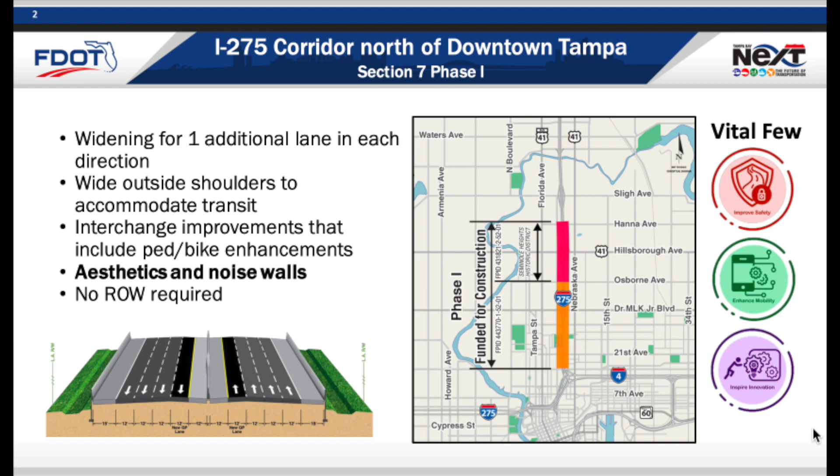Hi, this is Mauricio Rosas with an update on the construction project on I-275 from Martin Luther King to Hanna Avenue. This project was approved back in 2020, and the Department of Transportation substantially reduced the amount of widening that was initially proposed. This project is scheduled to break ground within the next couple of months and last a few years. So, at a recent Cafe con Tampa meeting, I asked District Secretary David Gwynn to explain what was happening north of Martin Luther King to Hanna Avenue.

So please, listen to what he has to say.

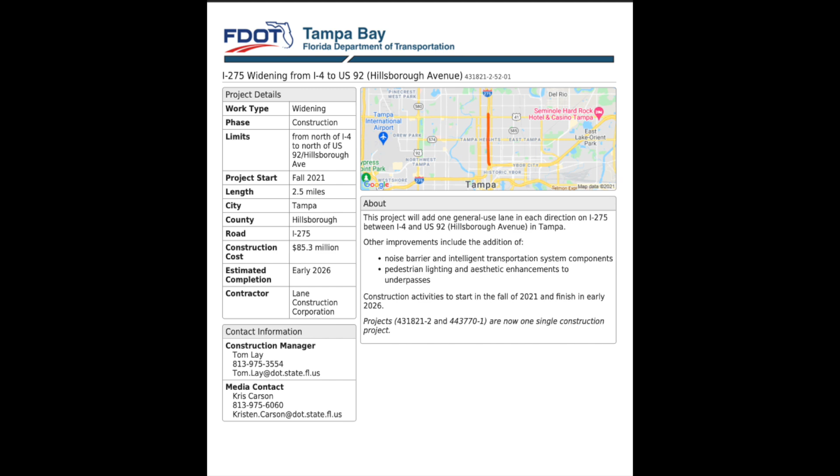David, thank you very much for what you've been doing. You've been doing this. Could you introduce yourself? Oh yes, I'm sorry, Mauricio Rosas.

Thank you, David. Mine's more of a, not so much of a question, as it is, can you explain the project that's about to break ground north of MLK? Can you explain on that, please?

Sure. So this is a project on I-275, essentially from just north of the downtown interchange to around Sligh. I have a video on our website. If you go to the Tampa Bay Next website, that shows the problem we have. But in addition to the problem of the two lanes getting onto I-4 from 275 and the two lanes coming off of I-4 to go north of 275, if you want to get in that lane for I-4 coming southbound, you've got to go past MLK before you can even get in.

And then people are backed up and you can't get over, and so that's where a lot of the problems occur. If you're going back the other way, for a few years I took every day the route from I-4 to go north on 275. As soon as you make that, and there's usually a lot of traffic out there, if you don't get out of that lane before MLK, you have to get off.

So what this project is doing, within the existing right-of-way and mostly within the existing pavement that's out there, is adding an additional lane all the way up to north of Hillsborough Avenue near Sligh. That's so people can either get in the correct lane earlier and get out of the main line, or have a longer distance to be able to merge over. So that fits in right with the downtown interchange project. So the two of them together work.

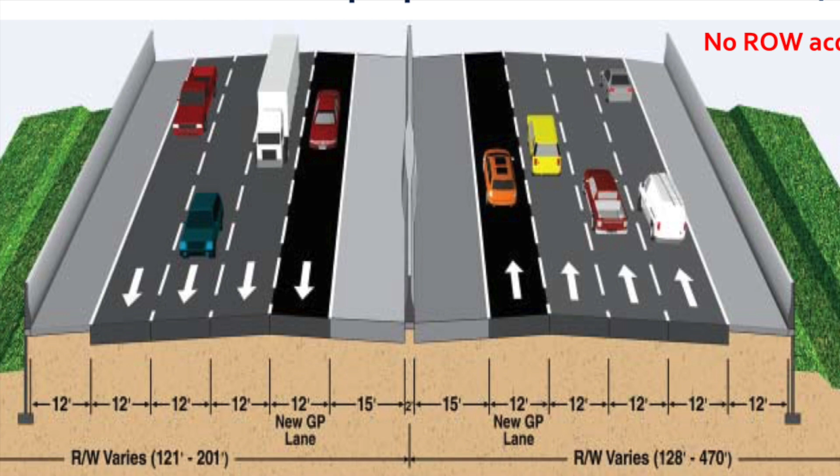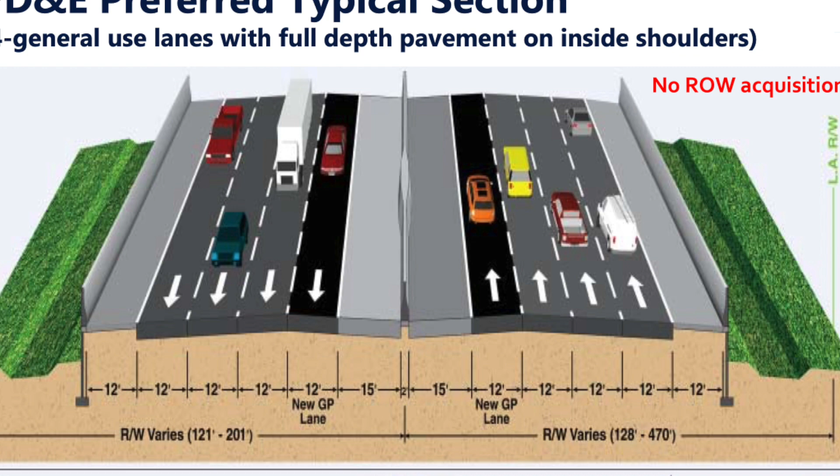As you can see from this image, there will be one lane added northbound, one lane added southbound, but this is not considered a complete rebuild, unlike the downtown interchange. There you will see significant changes to the Columbus Avenue and Martin Luther King underpass. The DTI project will begin sometime in the next several months. So we will have a lot of construction going on for the next several years.

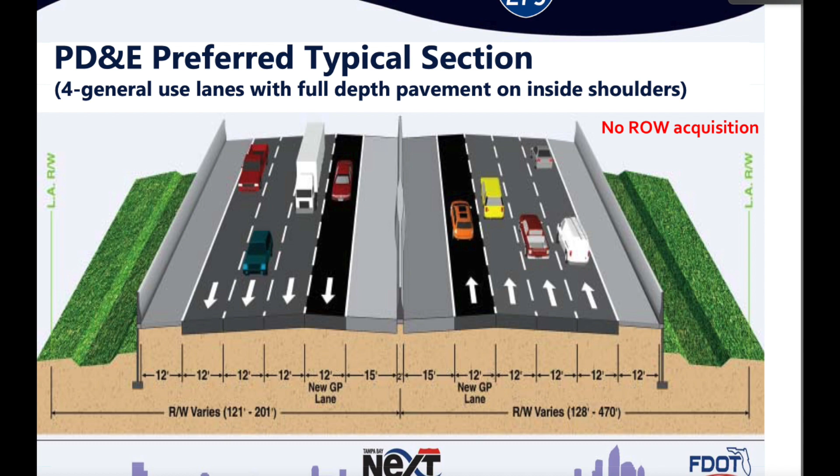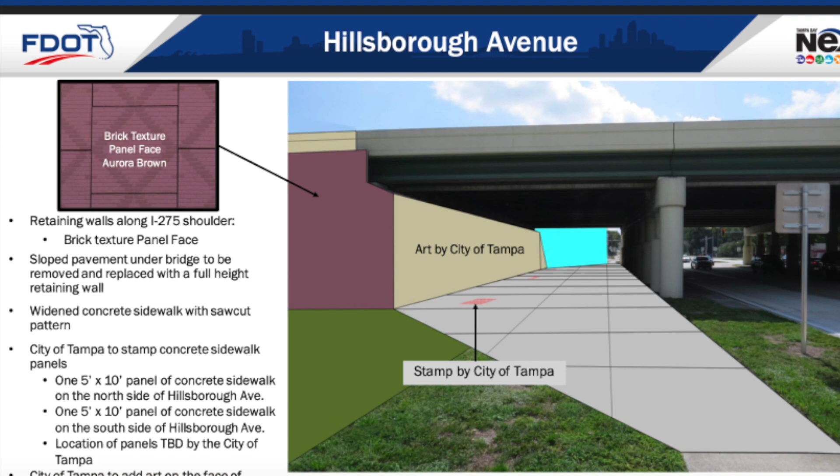Now let me expand on the slides provided by FDOT. Let's begin at the Hillsborough Avenue and I-275 intersection. That entire area is going to be rebuilt. So instead of having a slanting slope, it's going to be vertical.

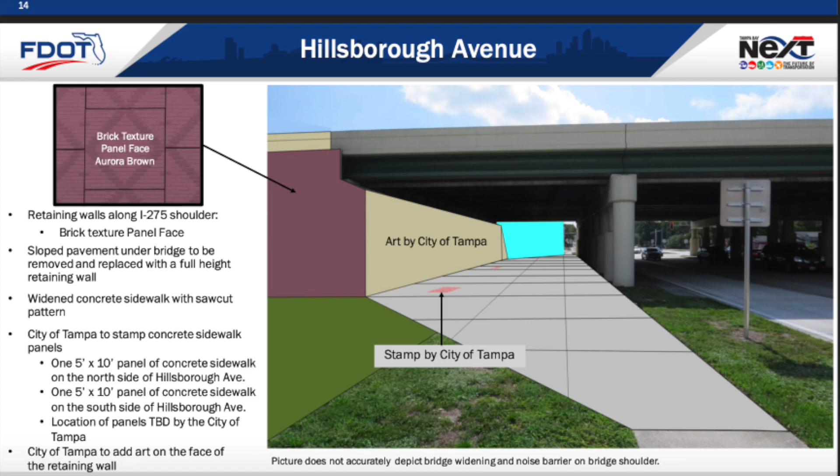We would like to see red brick fascia for the walls along that area because it lines up with the historic district. The new structure will also include public art from local artists.

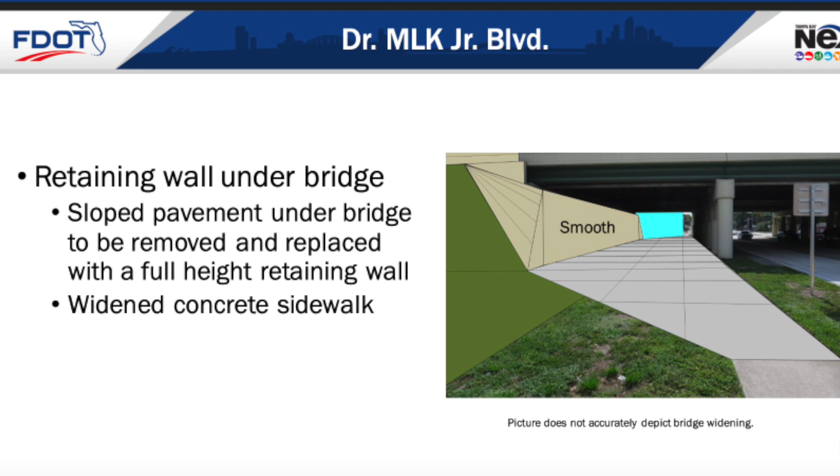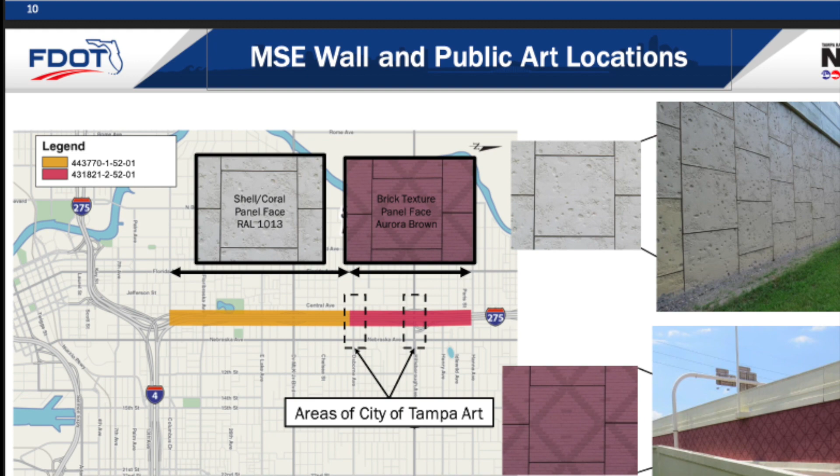Noise barrier walls will be put in on both the east and west side of I-275, from the downtown interchange all the way up to Hanna Avenue on the south side. But they will not have the same brick structure. The brick print is limited only to the historic area. It is more expensive, but we should see continuity as part of this structure.

The noise barriers along the shoulders will be 8 to 14 feet. Fencing will be removed and replaced along the frontage roads. They also plan to add fencing along the crossroads to prevent access along the right-of-way between private property and I-275.

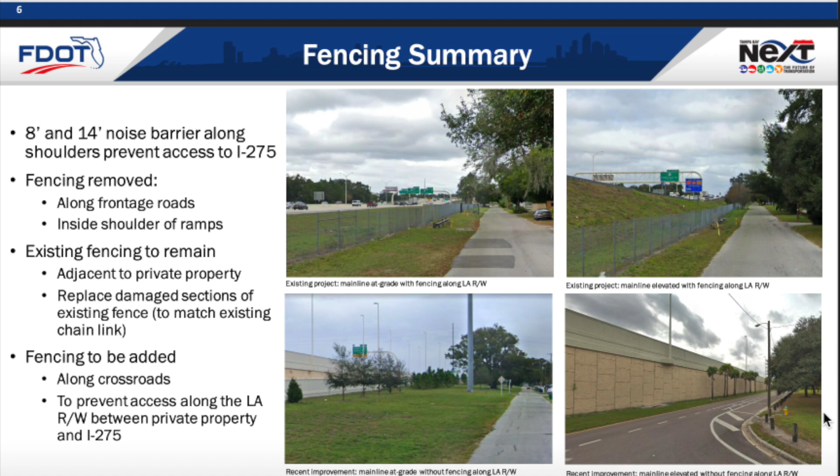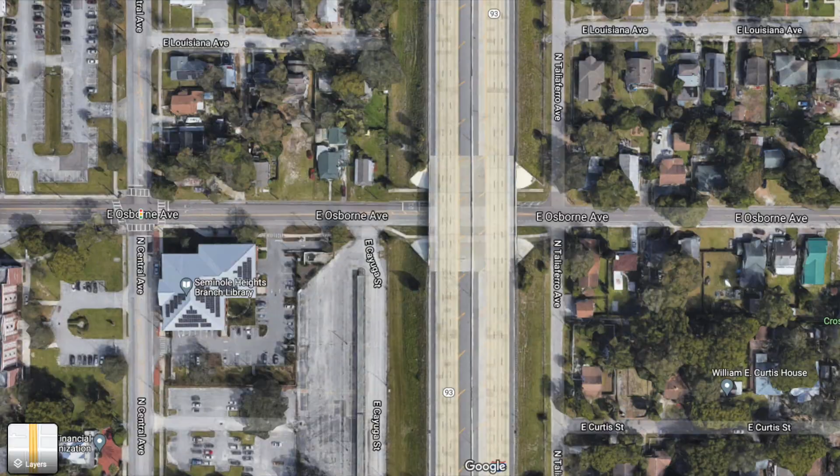The underpass at Chelsea and the underpass at Osborne will not be completely redone. Instead, they're going to add what they call gravity walls and fencing to keep homeless people from seeking shelter there. But that does not make them safer for students and pedestrians. The underpass at Osborne will have public art installations.

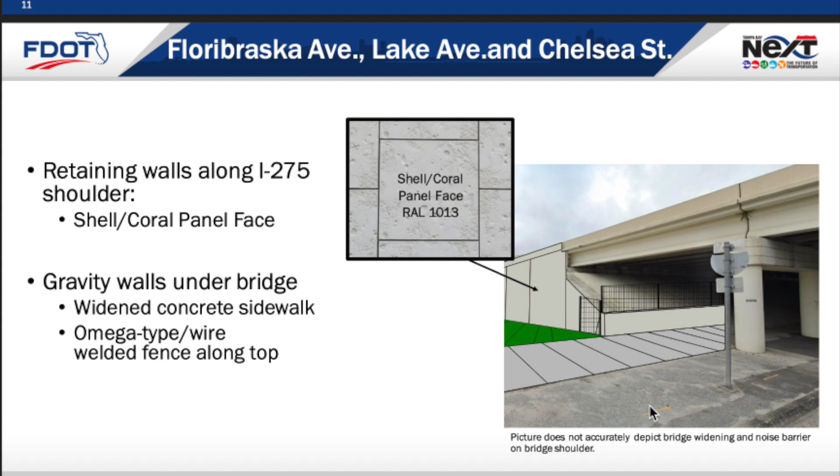And that's it. So what can we do better to engage the Department of Transportation, the city, and the county to improve Osborne and Chelsea?

Everyone's talking about public safety being number one. Well, Osborne Avenue has a high density of kids walking through it. There's Broward Elementary School, Hillsborough Middle School and High School, and the Seminole Heights Library.

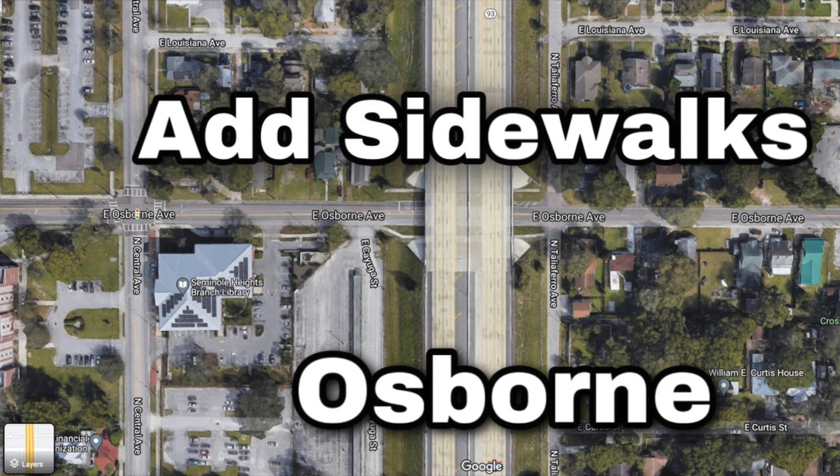I bring this up because there is a state law that says all roads within a 2-mile radius of a school must have sidewalks. What better opportunity to make this happen while there's ongoing construction on I-275? In fairness to the Department of Transportation, it is not within their scope to provide sidewalks.

But if the city and the county commissioners ask the Department of Transportation to partner with them, most likely they will. So it's our job as citizens to contact our elected officials so we can see the improvements on Osborne and Chelsea.

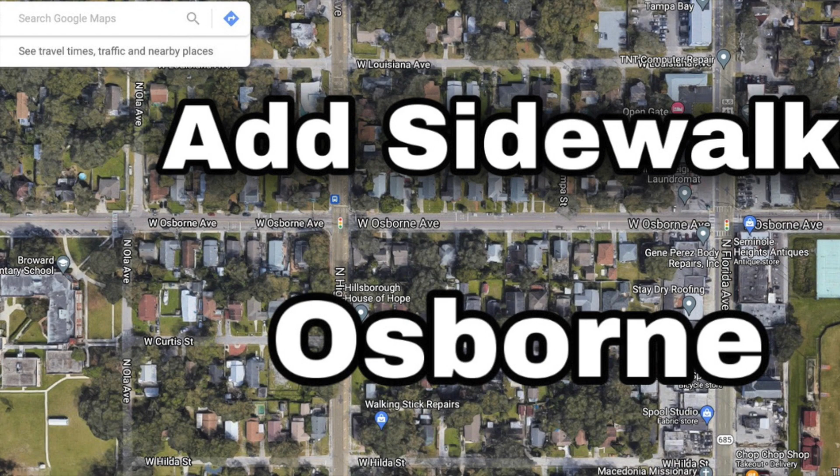There is an unanswered question about this project: what is the Department of Transportation doing to reduce the number of cars that travel along the highway and the roads adjacent to it? Within this project, there is nothing that they're doing to reduce the number of cars.

Though there is an opportunity on Taliaferro Avenue from Hillsborough Avenue all the way down to East Lake Drive, which connects to Robles Park. It would also connect to other bike trails, including the Ola Avenue Bike Boulevard. That's an exciting project scheduled to break ground within the next couple of years.

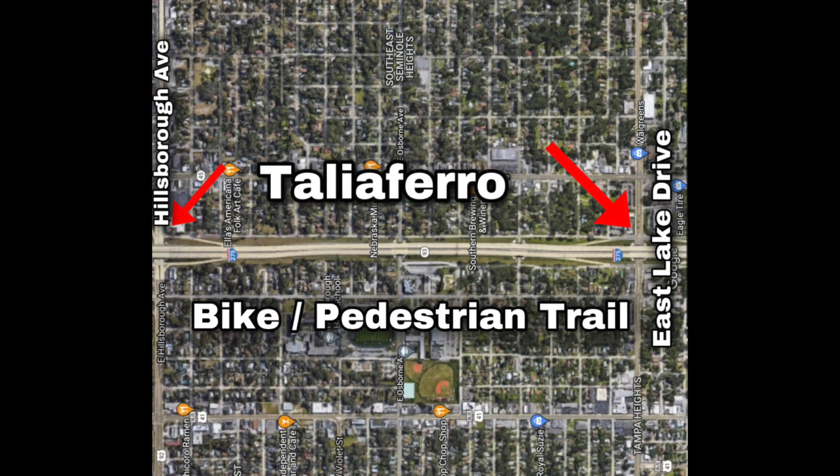Creating a bike-walk trail along Taliaferro Avenue is a good start to reducing the number of cars on the highway and our local roads. It would also help reconnect the east and west neighborhoods. It almost sounds as if I'm talking about reconnecting east and west Berlin back in the day.

So here's what I'm asking you to do. Please contact County Commissioners Gwen Myers, Mariella Smith, Pat Kemp, and Kimberly Overman. Also contact City Councilmen Guido Maniscalco, Orlando Gudes, John Dingfelder, and Joe Citro. Ask them to partner with FDOT.

Add sidewalks as part of the construction on Osborne and Chelsea from Nebraska to Florida. Create a walk/bike area on Taliaferro Avenue from Hillsborough Avenue to East Lake to help reconnect our neighborhood and reduce the number of cars on the road. Remember, this is about public safety and building back better.